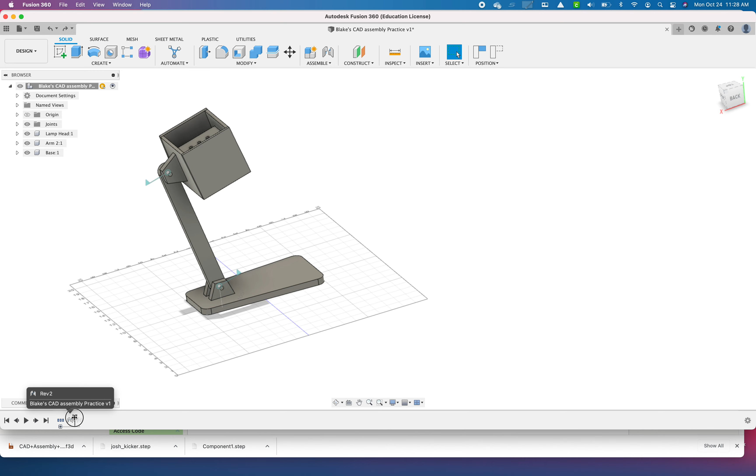First thing I'm going to do is go back in time in this file. I'm going to grab my history marker and pull it back one notch to take apart my lamp, so the head is off, but still one of the arms is attached.

Now I'm going to make another arm. I'm going to go to Create Sketch, click on a plane, do Create and Rectangle, 2-point rectangle, and make a shape right here.

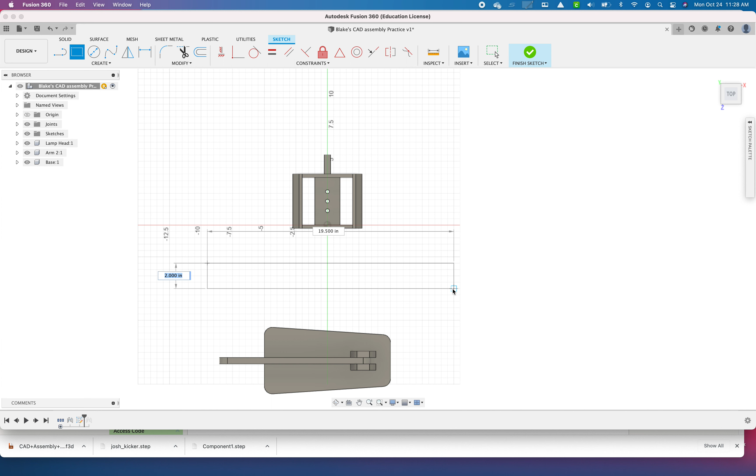I'm going to dimension this one different, 8 inches long and 1.25 inches wide. I'm using D for dimension here, or go to Create Dimension, and then click on a line, and then click to place to write that dimension.

I'm going to put 2 holes in here, but I want to make them on the center line. So I'm going to draw a center line from triangle to triangle on either side. I'm going to click on that line and hit X on the keyboard to make it a dotted line, normal construction.

X on the keyboard. I'm going to make those holes that I'm going to use on that center line. I'm going to dimension those holes with Create Dimension.

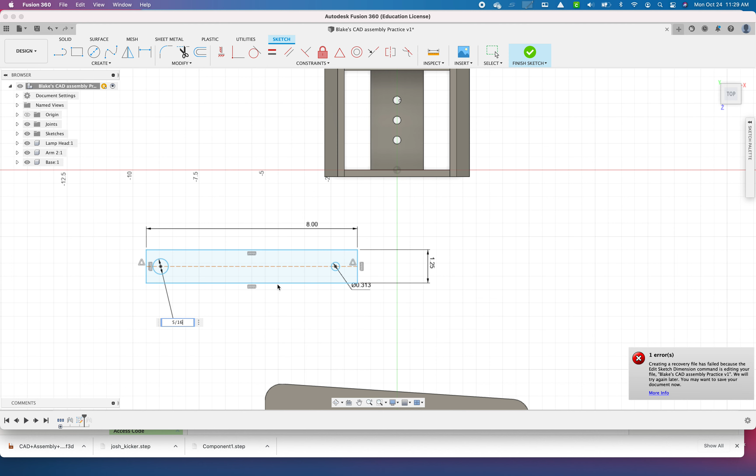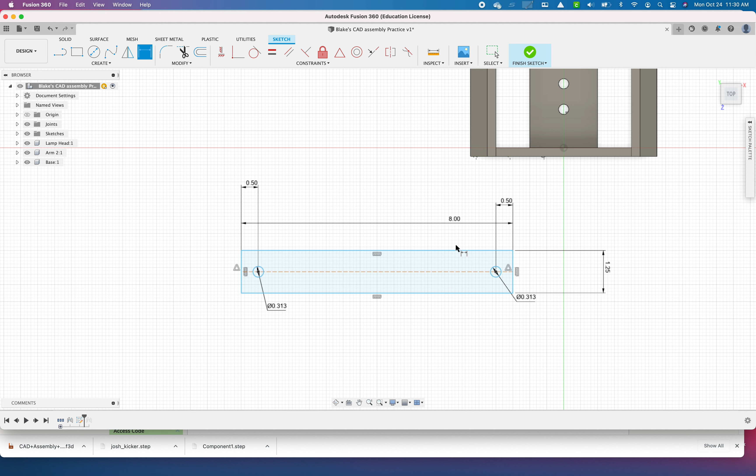Let's make that 5/16, and this one 5/16, and then these need to be the same, 5/16. They need to be the same distance from the end to look right, which I'm going to make 0.5 and 0.5. But then I'm going to hit Finish Sketch and Extrude.

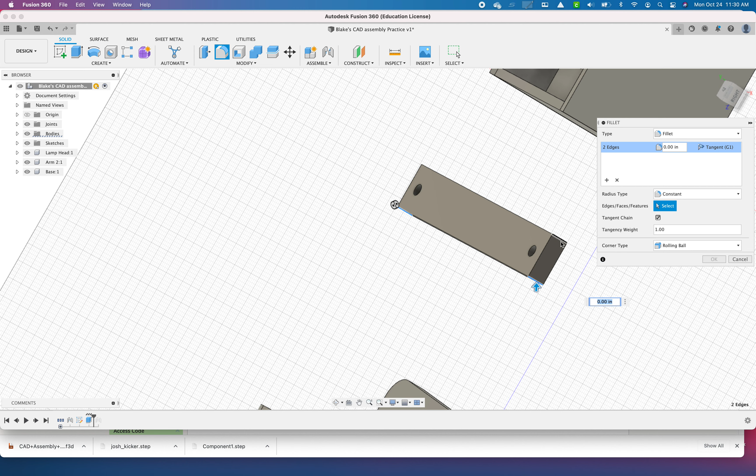And all of this is to create another part in CAD. So there's another part. I could round the corners using my fillet tool, but all of this is sort of optional. As long as you have something that you can build your lamp out of, that's what I'm grading in this assignment. I'm going to do a 0.5 round over on those guys.

So here's my other lamp arm I'm going to add. I'm going to go into the Bodies menu now and find this piece that I just made. I'm going to call it Arm 2. And I'm going to right-click on it and say Create Components from Bodies.

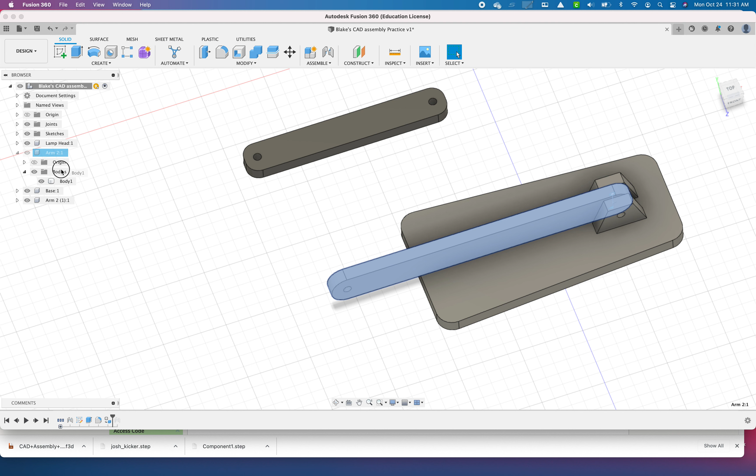Notice right now, if I go to Joint, I cannot connect this yet because it's not a component. To make it a component, all I do is right-click on it and say Create Components from Bodies. If I wanted to drag bodies into different components, you can do that, but this is going to be just the simplest way to have another component on here.

I'm going to rotate my lamp up by double-clicking on this little thing and bring it up to maybe 115 degrees or something like that. And then I'm hitting Enter there to capture that position.

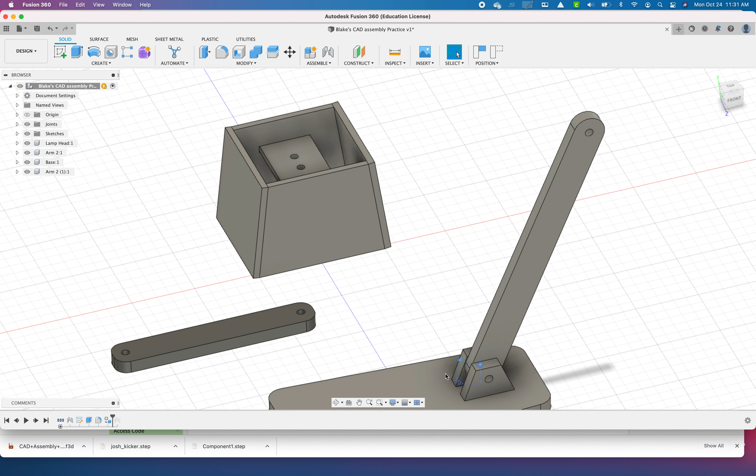And then I'm going to go to J for Joints and grab this circle and attach it to this circle here. Ooh, looks like it's stuck inside of the other one. You can use the flip button to put it on the outside. If I selected the wrong side there, now it's outside of there.

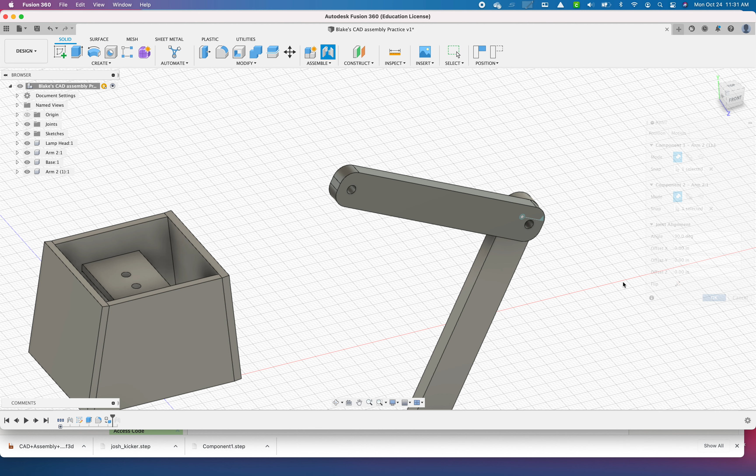And then I can add my lamp head to here as well. Circle, circle, and flip, and rotate. And click OK.

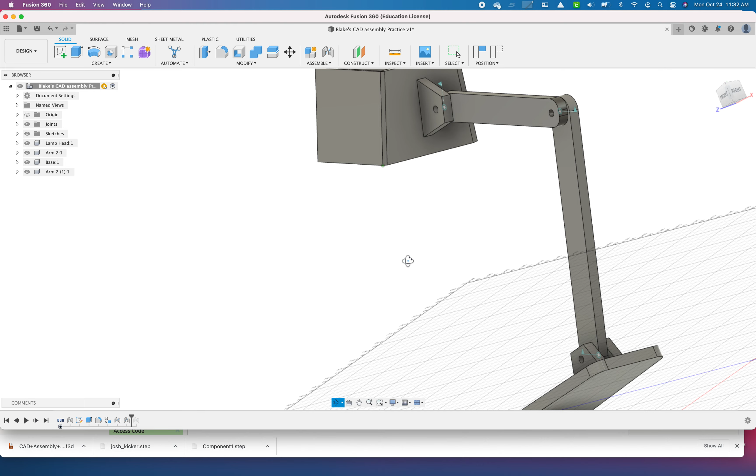Now I've got my fully assembled lamp with the extra arm on it, and that's what I'm looking for the exceeding for this assignment. Take a screenshot of this and turn it in on the OneDrive assignment.